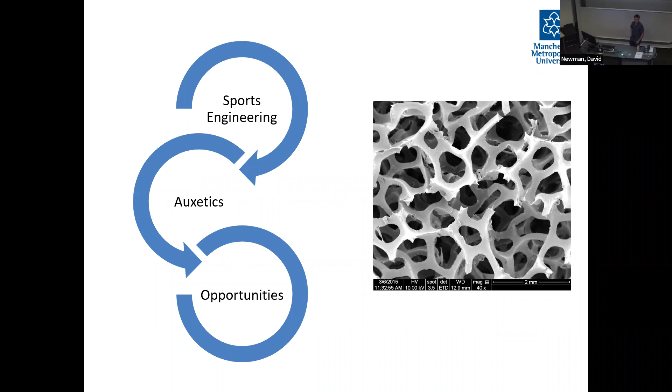So this is the structure of my talk. I'm going to start off by giving an overview of the work we do in sports engineering, an introduction to that field, then the work which we've been doing in Auxetic materials, and then finally bringing that together and talking about the opportunities to bring these areas together - that's Auxetics and metamaterials in general and the sports communities.

So first of all, what is sports engineering? Engineering is about solving problems, using a good understanding of physics and maths and the application of technology. So that's exactly what sports engineering is, except we're solving problems within sport. For example, how to help this person vault higher, or how to reduce their injury risk when doing so.

So I'm interested in the effect of technology on sport, and this distills down into three main areas. So we have performance, participation, and prevention, and that's prevention of injuries.

We can work with different organizations to look at different problems. And one of the nice things about the sports sector is it tends to be rapid uptake. So it's a good place to test and explore opportunities for things like metamaterials and to explore manufacturing. And then this can then feed into other industries afterwards. So it's an ideal test bed.

I work with different organizations and I'm on different committees. So I'm on the committee for the International Society for Snow Sports Safety. That's all about reducing injuries in snow sports.

I'm involved with the Biomedical Engineering Division, so the committee of the IMechE, and that is where sports engineering fits. But sports engineering can also feed into health and recreation as well.

I'm on the BSI committee, protective equipment for sports players. So that gives me a really good understanding of the role of protective equipment and how we can regulate and certify that. I'm the editor of Sports Engineering Journal, and I'm also the lead editor for the next Routledge Handbook, Sports Technology and Engineering. So that's going to be the second edition.

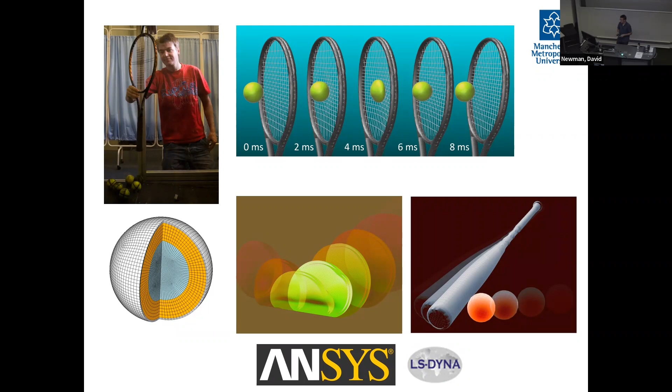My work typically involves experimental mechanics and modeling to understand the performance of sports equipment and associated materials. And we often use high-speed cameras, as you can see here.

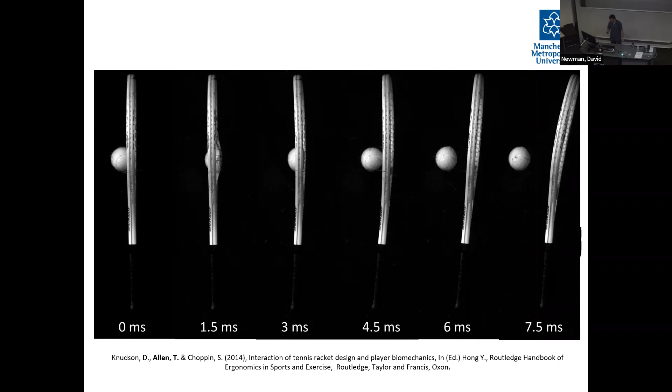This example is for a tennis racket, and we can really use these cameras to look at this in detail and understand how the ball and the racket interact and how the racket vibrates after impact. I have a couple of examples here. The one at the top, you can see the impact position is lower down and the racket is vibrating more, whereas the one in the second image underneath, we're impacting more towards the center or the node point, so we have fewer vibrations of the racket.

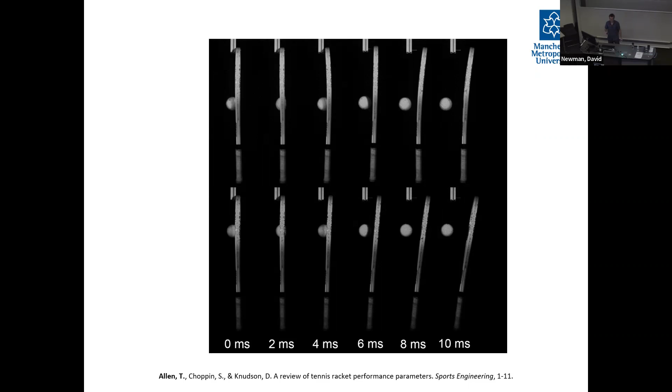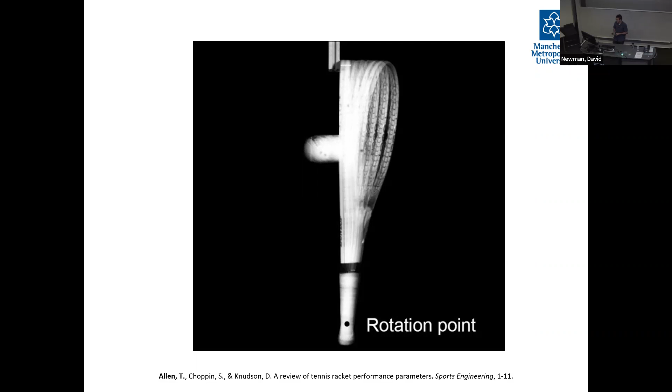And then we can look at other concepts such as a center of percussion, where the force is translated through the hand and you get less jarring effect. So that's just a few examples of how we use high-speed cameras.

but also the governing bodies as well. So the ones who set the rules, ensure the game is fair and the injury risks are low and athlete welfare is really considered.

And museums such as the Wimbledon Lawn Tennis Museum, where we can go and characterize things like old rackets, and then that feeds into education. And then research organizations as well, such as the UK Metamaterials Network.

So there's lots of opportunities in sports engineering. As I was saying before, it's a rapid uptake sector, so it's a good place to test and try new materials and bring them into products. I'll be talking about some examples of that as we go through.

Now talking about sports engineering specifically, these are some of the areas I'm going to talk about. The work we've done on wrist protectors, where we've developed the first ISO standard for snowboarding wrist protectors. Rugby padding, working with World Rugby to update their regulations for body padding. Running shoes, looking at the degradation of shoes and how that affects performance and injury risk. And then tennis rackets, where I'll give an example of the work I've done to implement auxetic materials into tennis rackets with my partners.

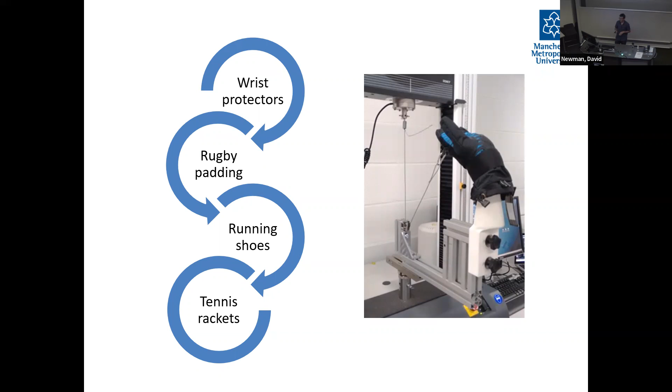So first of all, wrist protectors. We're working with the International Society for Snow Sports Safety and the BFU, the Swiss Council for Accident Prevention, to develop a standard for snowboarding wrist protectors.

Wrist injuries are really common amongst snowboarders. As you can imagine, you've got your feet strapped to the board. If you fall over, your natural instinct is to put your arms out, and then you can fracture your wrist, or you fall backwards. Around 30 to 40% of all injuries are to the wrist.

There are wrist protectors available, but most people don't wear them. And before we started working on this project, there was no standard. So we developed this test.

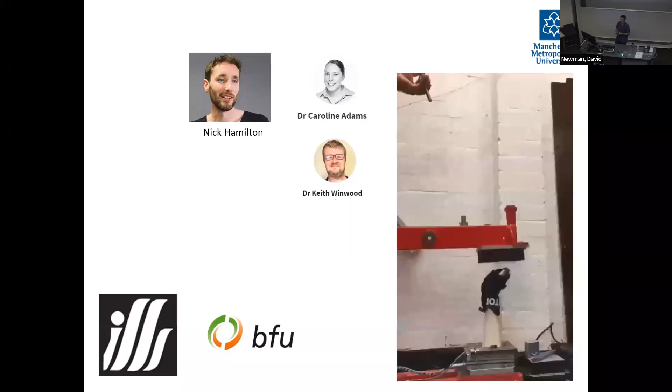I'm working with Nick, who's at Sheffield Hallam University, Caroline and Keith. Keith and Caroline working with me at Manchester, but Caroline's now at the English Institute of Sport. She developed this rig as part of her PhD.

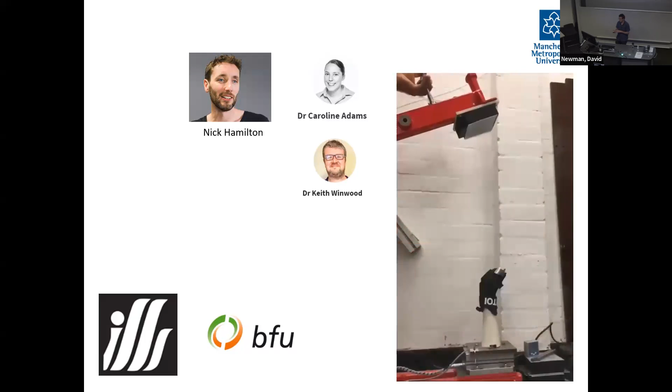We can see we can simulate this very harsh impact down onto the surrogate wrist, with the wrist protector fitted as well. We can measure the angle of the pendulum, the force transferred through the wrist, and the angle of the wrist as well.

We can use advanced techniques such as digital image correlation, so we have a pair of stereo calibrated cameras. We have a speckle pattern on the back there, and you can see that we can measure the displacement.

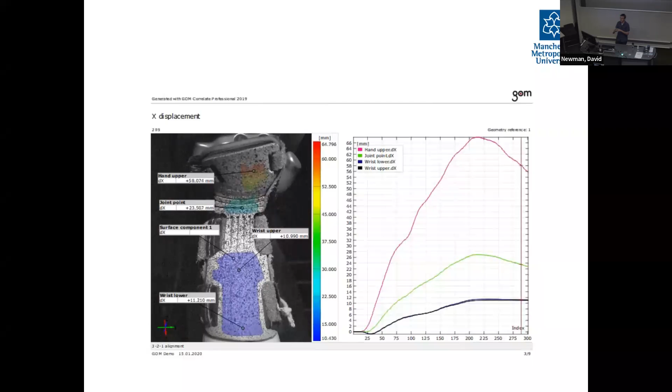And we've done lots of different iterations, particularly involving developing the surrogate we're testing with, so the wrist, to make it more realistic, or more biofidelic.

And this led to the development of this new standard. Now that we have the standard published, we're moving into working with the manufacturers to ensure their products are certified to that standard.

We're working with different organizations, such as the snowboard schools and the BFU, to raise awareness of wrist protectors amongst snowboarders, and then ultimately to document injuries. This will then all feed back to a future revision of that standard, so we're continuously monitoring what we're doing and looking to improve.

In similar work, we're working with World Rugby to develop standards and regulations, to review their existing standards for body padding. Rugby players often wear body padding, particularly on their shoulders, and that is to prevent cuts and abrasions to soft tissue. It's not to prevent severe injuries such as dislocations and breaks. That's a common misconception, but that's World Rugby's intention, and that was something we had to really consider when reviewing these regulations.

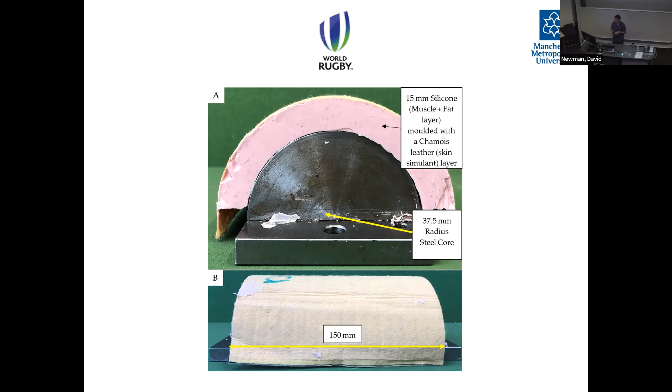Similar to the wrist protectors, we built a surrogate, like you can see here. This is a basic surrogate to represent the shoulder. We've got a steel hemisphere covered with a soft tissue simulant and then a skin simulant on top of that.

Like I was showing before, we can do testing, so experimental mechanics. Here we've got an impact test coming down, that's on one side, and on the other side, you can see we can angle that plate and look at different scenarios. We can put padding on top. We have load cells underneath, so we can measure the force, just like with the wrist protector, and we can film with a high-speed camera.

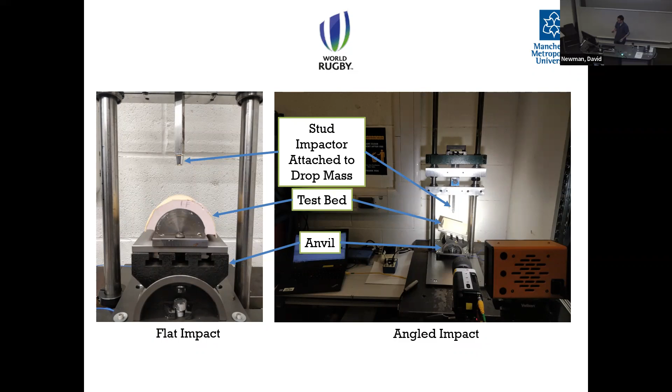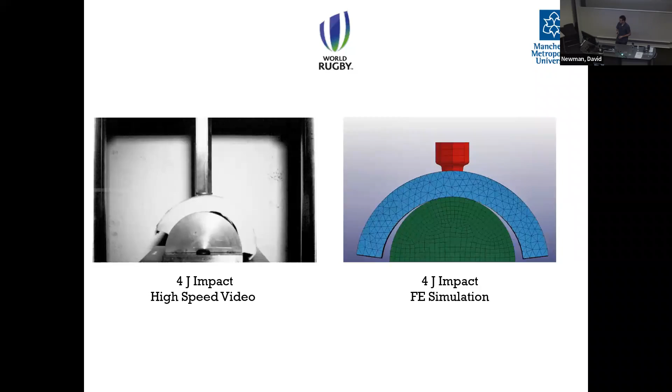Some different scenarios here that we're looking at with the model, just a couple of examples. One, we can look at the effect of placing some kind of protective material on top, with a raking scenario underneath. This led to the update of the body padding specifications.

So just like we're doing with the wrist protectors, it's now about working with the different organizations that make this padding to ensure their products become certified, documenting the number of certified products on the market, how often they're used, and then how this affects injuries.

And continuing that cycle of updating and improvement. Some things that we've done, what's important with these regulations is to ensure they're not restrictive, so they don't stifle innovations, such as the application of metamaterials into these products.

Another example here is some work I was doing with my students on running shoes. We're looking at the degradation of running shoes, which would be used in a marathon, for example. You might run for several hours and the shoe properties could change, particularly over a sustained period of time. So if you're running marathon distances while training over a long period, the shoes can degrade. We have a test here where we can mimic that.

This is filmed with a high-speed camera. We can compress the shoe many times, see how the properties change over time. Once we have the test set up, we can then explore different solutions, which could be improvements to material or using structures rather than foam. And that can have implications for both performance and injury risk.

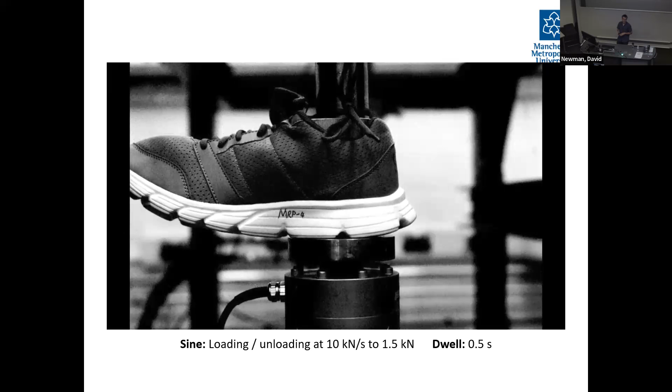And the final example from sport is with the tennis rackets that you see here. We're interested in characterizing how the tennis racket has changed since the origins of the game, and the influence this might have had.

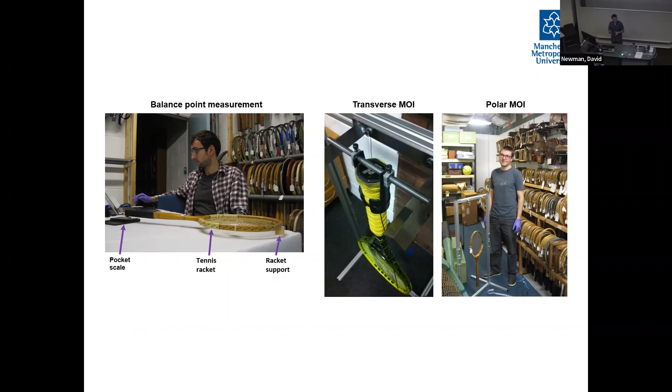This is myself and Luca. We're very lucky we got to go to the Wimbledon Lawn Tennis Museum. Luca's there measuring the balance point, and I'm measuring the moments of inertia. We're measuring lots of rackets, so as you can imagine, we had to have quite slick techniques to go through, but also ensure it was rigorous as well.

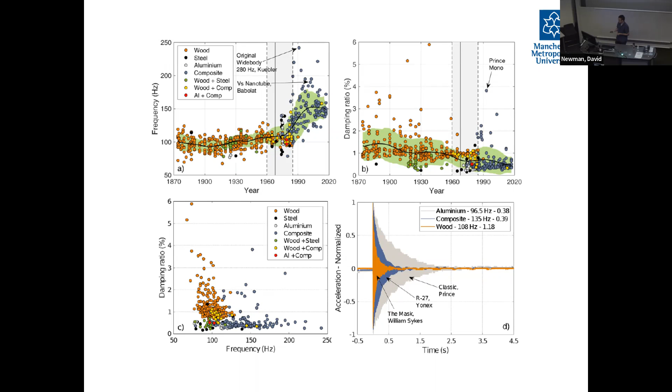We published this work in open access, in MDPI Applied Sciences. One of the key things here is we were talking about the potential to use auxetics and other advanced materials to overcome some of the problems that we saw. And that's exactly what I did.

Myself and Andy, who I work with very closely on the auxetic materials, we approached the tennis racket company Head and we talked to them about the idea of auxetic composites. We showed them that you can make auxetic composites using the conventional materials which they would use, by just laying up the composite layers in a different way. This was something they were interested in, particularly when we explained that that can have an improvement in the vibration damping.

That's one of the key benefits of auxetic materials, and they liked this idea. We worked with them, and that led to a range of tennis rackets which are now on the market. Now we're really looking forward to continuing to work with them to realize the full potential of these materials, and also to really understand some of the potential benefits.

So now I'm going to talk about the work we've been doing in auxetic materials. This is some of the people in the team that I work with. We have Todd, who's doing this as part of his PhD, Keith and Ollie, who I work with in Manchester, and then Andy, who's a professor of smart materials and structures at Sheffield Hallam University.

Andy and I started working together about 10 years ago, and we've been really doing a lot in this area to bring together his area of smart materials and my area of sports engineering. And that's what I'm going to be talking about now.

Many of these materials, it's related to the structure of the material that gives them the unique properties. So we have the auxetic foam on the end here. Because of the specific structure, which I'm going to talk about in a minute, when we pull that, it will expand. Then we have one of Ollie's structures, which he's currently working on, in the middle. This is a 3D printed structure, but this animation here is from a model.

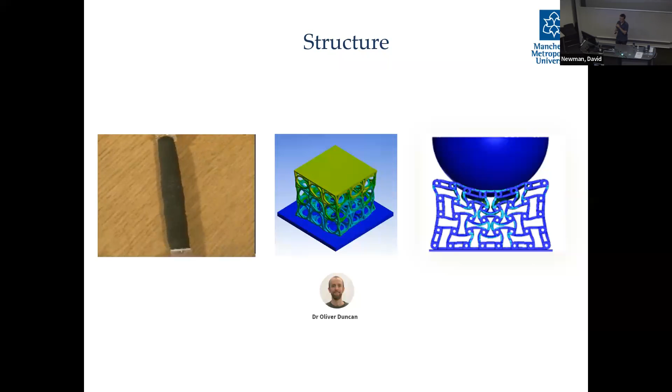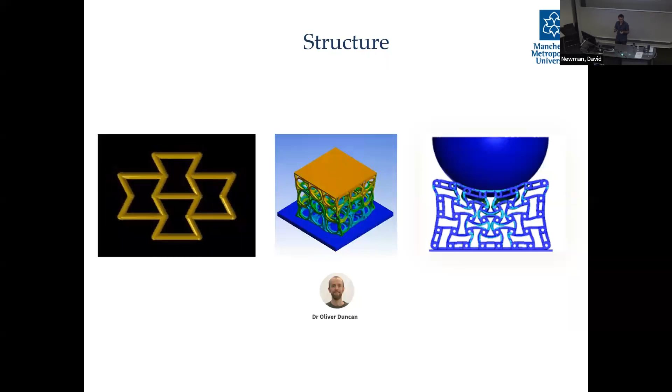On the far side, we have a 3D printed structure, so that's an auxetic structure. You can tell because it's coming inwards, and that's one of Todd's structures. The difference between this and the foam is because it's 3D printed, we can finely control the design of that structure to get the properties that we want. We can look at different structures, and we can vary different things and look at gradients. I'll be talking about that in a minute.

First of all, this is a definition of Poisson's ratio. A conventional material, when we pull it, will contract. With an auxetic material, it will fatten and expand. So it's counterintuitive.

There's different ways of achieving this. It's often related to the structure. This is one of the PhD students' work that Andy and I supervised, and here we're looking at rugby padding. We've got conventional foam, but we've cut this specific pattern into the structure that you can see here. So this pattern, when we pull it, causes it to expand and have those auxetic properties.

Quite interesting, when we were working on the rugby project, we actually saw some auxetic patterns in the rugby padding, which we were cutting out of the jerseys and looking at. So that's the way that they were shaped.

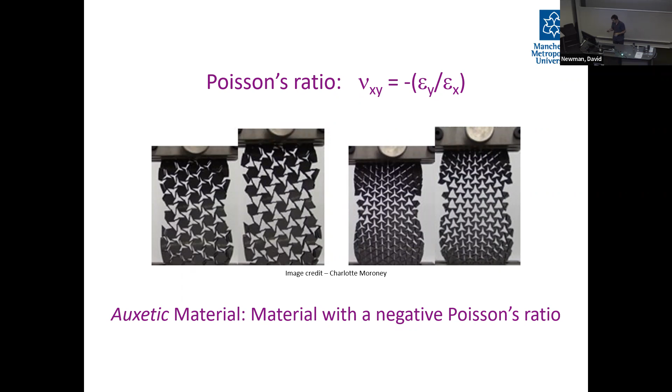And if we can get Poisson's ratios down as far as -1, then in theory, our hardness or indentation resistance will tend towards infinity. That's interesting from a theoretical perspective, but from my perspective as a sports engineer, it's, well, can we actually produce materials which do that?

And can they work in that fashion over the full strain and strain rates and scenarios which we're interested in? So that's the real challenge.

And then we have curvature as well. Our conventional material, when we bend it, will saddle at the top. Whereas our auxetic material will form a nice dome shape, which we call synclastic curvature. And there could be some benefits there, so it could fit inside a helmet or a knee pad or a shoulder pad in rugby. There are some examples already of this, which I'll be showing.

This is one of Ollie's videos showcasing the indentation resistance. These are open cell auxetic foams. We've got a range of Poisson's ratios going across here, and we're indenting them with a cylinder going back into the screen and coming down on top of a cube. We can see the auxetic material is coming inwards, as we would expect, and densifying underneath. The zero Poisson's ratio is coming straight down, and the positive Poisson's ratio, conventional material, is coming outwards.

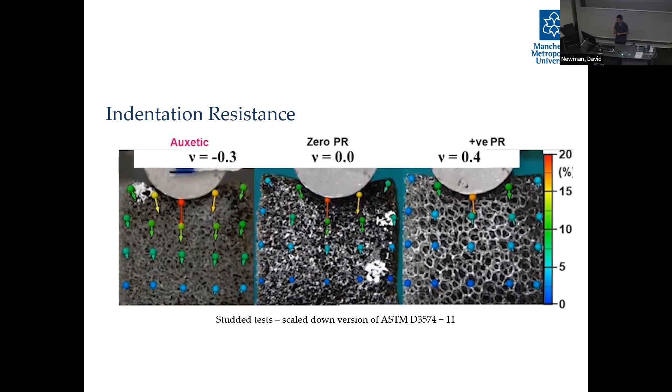We can have auxetic materials in nature. We've got some examples here. And as I was saying before, they're also starting to emerge in sports equipment. In the middle is a tennis racket from Head, which Andy and I worked on, based on auxetic composites. And then we have some other examples as well.

We have some running shoes. In green, we have the Under Armour running shoe. You can see that classic bow tie structure, the very classic auxetic structure there. What's interesting is that it varies across the top of that shoe, so you can have different properties in different places. I think the idea is it can be quite tight, then you put your shoe in and it will expand and fit to the areas where you want it to fit.

And then we have the Nike shoe underneath. You can see the sole, you can see the structure is cut through that, so that will bend and move in a certain way when you bend it. And then we have the Puma shoe, where we have the structure going through. One of the things you'll notice is that many of these examples are based on the structure of the material, rather than the material being auxetic itself.

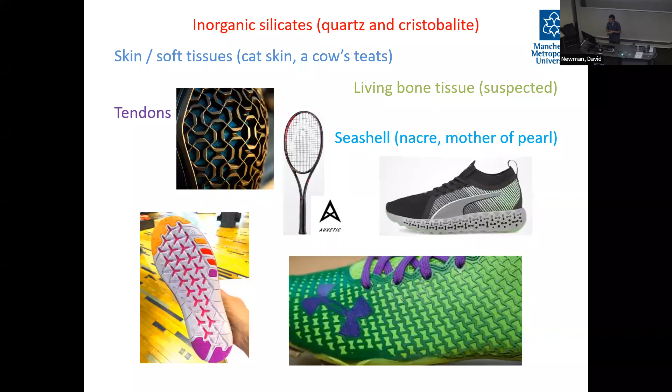And then we have an example at the top there for a knee pad. Exactly what I said before, it forms that nice dome shape, and that's the benefit we're having here. You can see from that as well, it's relatively similar in shape and concept to the Under Armour shoe underneath in green.

So I'm going to talk about the work we've been doing on auxetic foams, and some of the key publications to do with the sports area that we published.

First of all, we need to make the foam. We've actually been able to do this for a long time, right back to the late 80s. But from the sports engineering perspective, it's more about how do we make it more consistent, mass produce it, and test it in large samples. We take our conventional foam with a conventional cell structure, then we need to compress it to get this reentrant cell structure, because when we pull that reentrant cell structure, it will expand and give it that negative Poisson's ratio. So we can squash it into a box, using some kind of pressure. There are different ways in which we compress it.

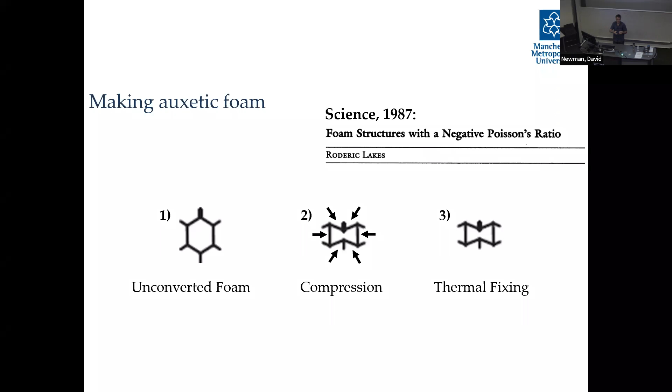And then we need to fix it as well. So we could place it in an oven so it softens, and then take it out so it hardens, or we could put it in some kind of chemical bath that causes it to soften, and then take it out. We're basically changing the structure and then setting it in that new structure. Typically, we would use thermomechanical methods. And I'll just give an example here.

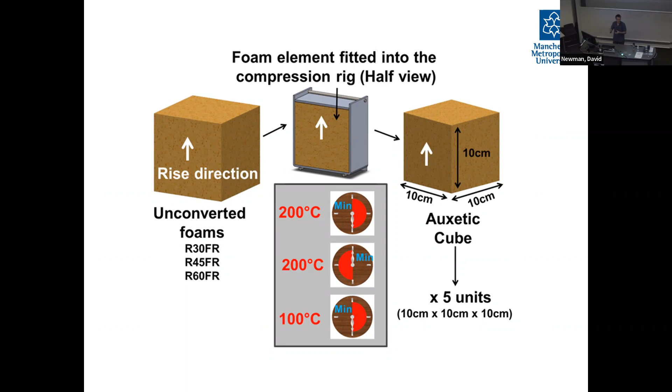So we take a cube of foam, for example, squash that into a metal box, place it into an oven, and then take it out of the oven, let it cool in the box, and then we have our Auxetic foam. Relatively straightforward process. You can see here we've got the metal molds, and this is purposely quite straightforward because we wanted to do this in our labs and be able to demonstrate it.

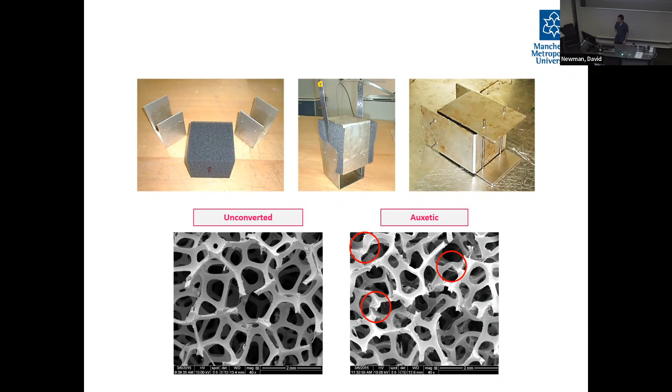We can do different testing. So we can have quasi-static testing, where we might compress it between two plates, or pull it, film with a camera, check that Poisson's ratio, also dynamic testing as well. I think that's one of the areas that our group's quite good at - dynamic testing, because that's where it really applies to sports equipment. It has to actually work in the area where it's needed.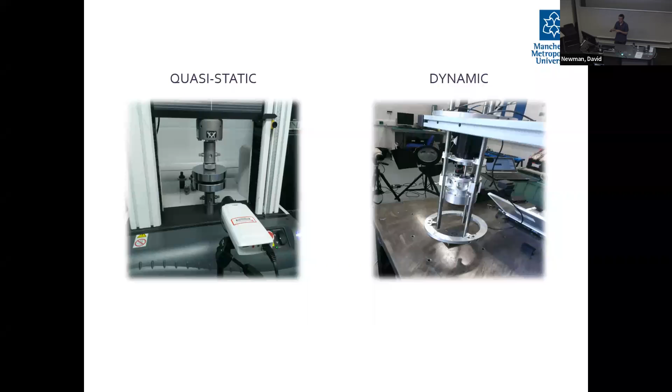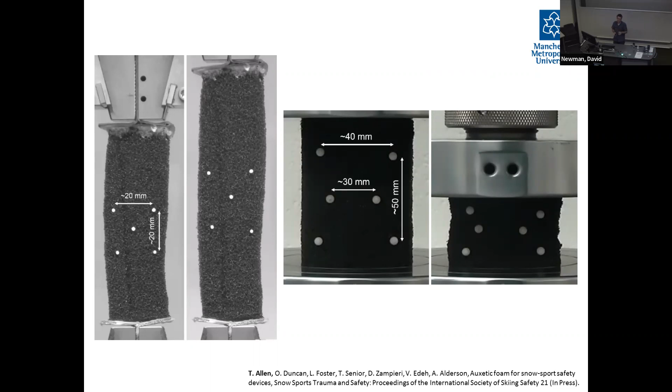So some examples from some of our earlier work, where we have a tensile test, and we have some pins in there. So as we pull it, we can track to see if those pins are expanding and measure the Poisson's ratio. And then we have a compression test, where compressing and contract, see it's contracting. We've moved away from that now, and we tend to do more full field strain measurement with digital image correlation. And I'll show you some examples of that as we go through.

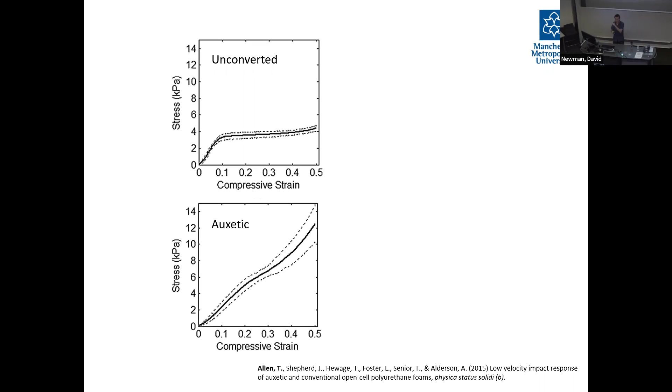We can look at our stress strain relationships - the force that we're applying and the amount that it's compressing. And we can see for our conventional material, we have that expected plateau region. Whereas our Auxetic material, because we've already compressed it, we see a much more linear stress strain relationship. And this is related to the cellular structure, as I was saying before.

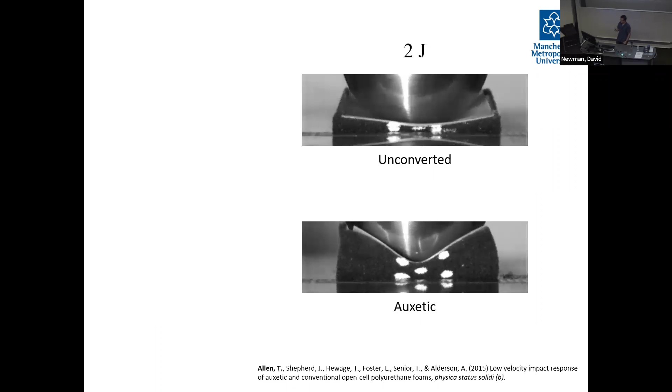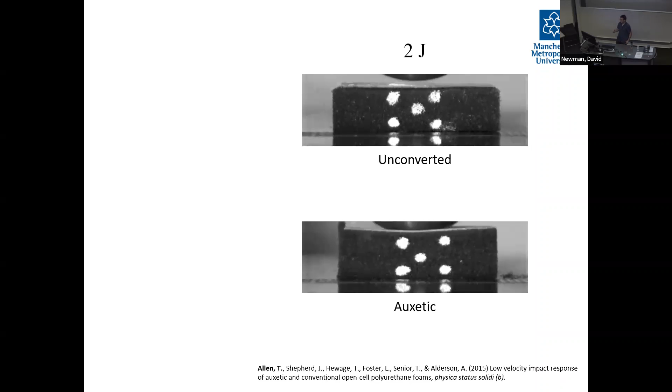What we're really interested in is dynamic tests. You can see here, so we're dropping a mass down onto our foam. At the top, we have our sample of foam - these are open cell foams, unconverted, with a thin shell on top to mimic some kind of body armor, and then a hemisphere made of steel coming down on top. And then underneath, we have our Auxetic sample. We have the marks on here, you can see as well, so that allows us to track it.

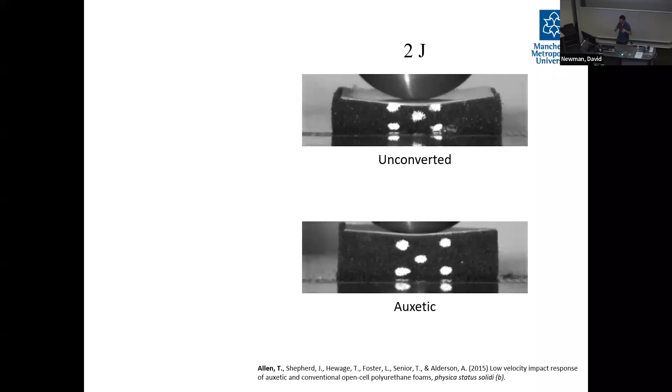Again, this is relatively old, and now we're using more full field strain measurement. You can see for our unconverted, it offers very little resistance to that dropper, and you can see the dropper is pretty much striking against the table. The Auxetic is coming in exactly as we'd expect, preventing it from striking against the table.

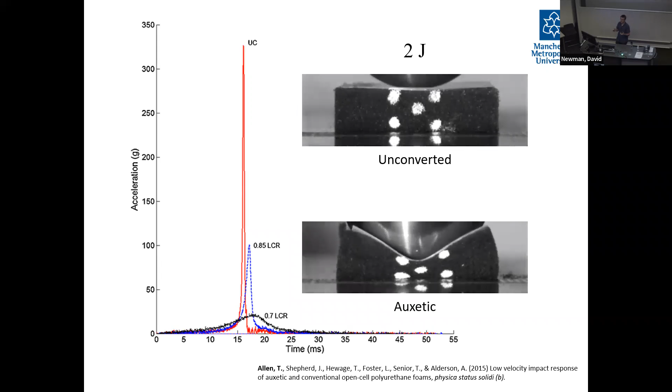So when we look at our acceleration time trace, because we have an accelerometer embedded within the drop mass, we can see for our unconverted, we have that very short, sharp increase in acceleration - that would be bad, that would be related to some kind of injury risk. And then when we look at our Auxetic material, we have a much flatter, that's in black, longer, pronounced acceleration time curve. And then our other material in blue, which is the intermediate, so might be closer to a zero Poisson's ratio, is somewhere in between. So exactly as we'd expect.

And what we do is we combine the raw data with the high-speed camera to give us a really good understanding of what's going on. Once we understand, we can then start applying it.

So now I'm going to talk about closed cell foam, because what I've been talking about before was open cell foam. It's very easy to work with, very easy for us to do our experiments with. But the problem with that is it doesn't really apply to sports equipment. Maybe in some kind of comfort layer in the helmet or padding in the upper of the shoe, but not so much in performance applications, like within the running shoe, and in the midsole.

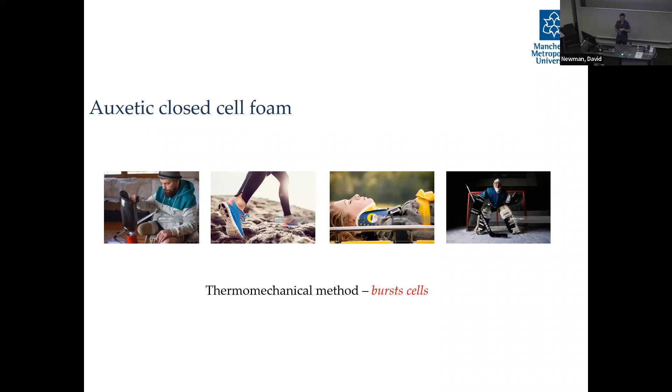So we're interested in closed cell foam, which is much stiffer. It's stiffer because the air is trapped within the cells, so when we go to compress it, it can't just come out of the cell like it does with open cell foam. But that also makes it harder to work with, because if we were to use the same process and just compress it and heat it, we would essentially just burst the cells. So we need to look at other ways of doing this.

So there was this paper in 2018, and Ollie's made a nice animation to explain this. Essentially what we do is we steam the foam, so this is just water. We put it in the oven and we steam it in a steam bath.

The water goes into the cell and that causes it to contract, as you'll see here. And as it dries, you're then left with that reentrant cell structure, which gives it that negative Poisson's ratio.

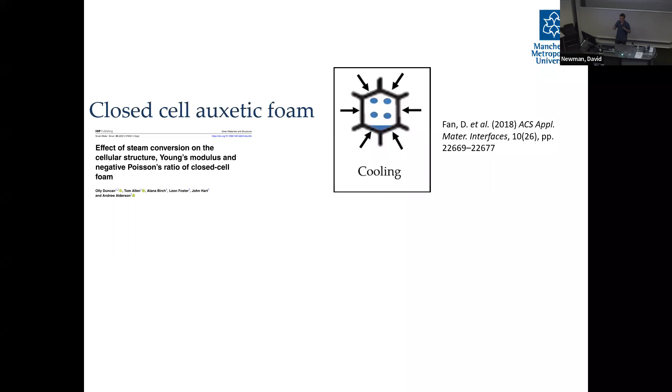So we got inspired by that original publication, and we then took this and did our own publication. And what we're doing, because we're more on the applied side, is taking that and saying okay, that's a nice idea, but how does that affect the parameters? If we change the different parameters, what's the best way to make it consistently, make it in larger samples? So we published on that.

And then we had a follow-up publication as well, where we're looking to see if we can manipulate the properties of the foam during that process. So if we were to place pins within the foam, could we stretch it in one direction whilst contracting it in another, getting very distorted or elongated cells, which would give extreme properties?

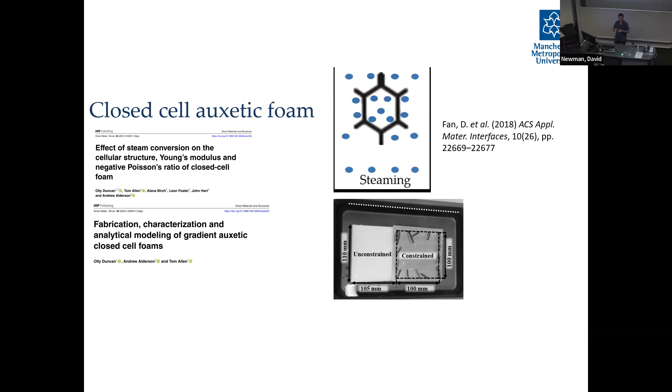Or maybe one bit would be steamed and one bit wouldn't be steamed, and then we can have negative and positive Poisson's ratio in the same part of the material. And then that allows us to look at gradient structures.

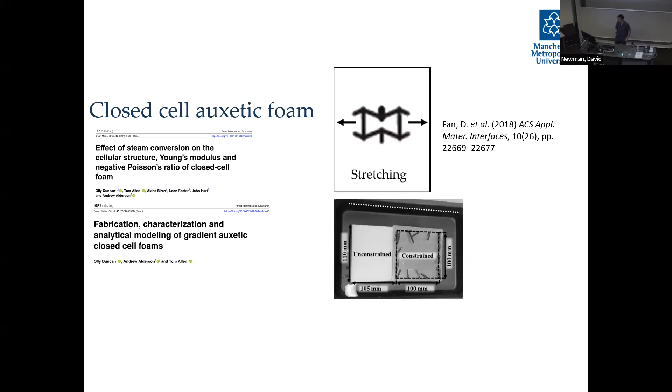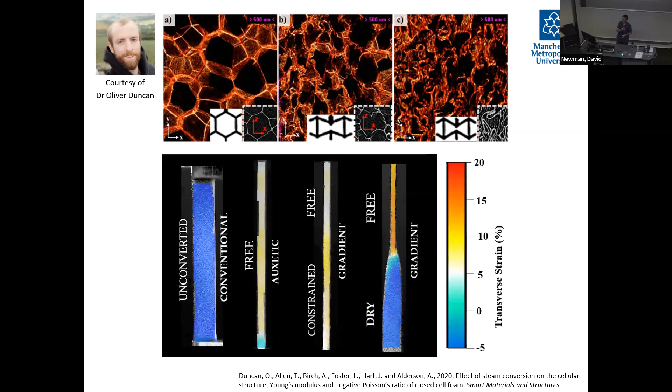And then we have our gradient structure, so half of it might be auxetic and half of it might be conventional. And that's because half of it has been exposed to the steam bath and the other half hasn't. It's relatively straightforward.

Again, we're more interested in moving towards production, having this in actual products, and that's quite hard to achieve using a process like that. So what we're looking at is a pressure vessel, and this goes back to '96, a relatively old method. We've been meaning to do this for a while, and one of our technicians at the university really helped us with this, because he came up with this very simple design for a pressure vessel.

And we're using off-the-shelf components, so it's low cost, simple to put together, and crucially, we don't have to go out and get it certified, which adds extra cost and uncertainty, because obviously taking a pressure vessel and putting that in an oven is quite a dangerous thing to do.

So this comes pre-certified, bolts together, and we put a little valve in it, and we can pump it up with a bike shock pump. So it's very simple, straightforward process. And then we have a thermocouple inside to measure the temperature.

And then what we found was there was an extended period at the end where the foam would be settling and maybe slowly expanding or changing or contracting at the end of that process. And that was quite slow. That actually lasted for several weeks, where Ollie would be continuing to measure the properties.

One of the things that we found was if we put it in a vacuum chamber overnight, that accelerated the process, and then the next day the foam had settled. And it's probably possible that it would actually settle much quicker. We just did it overnight and then we checked it in the morning and it was fine. So that all went into that publication.

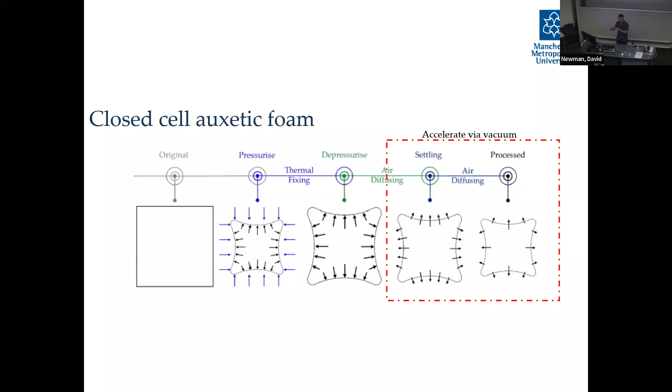Some of the other work we've done is actually measuring the Poisson's ratio under impact and in dynamic scenarios, to check that it actually transfers, because that's important, and also transfers to the strain magnitudes that we're interested in.

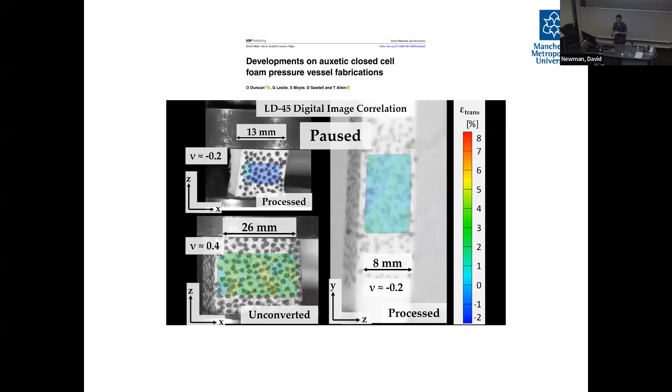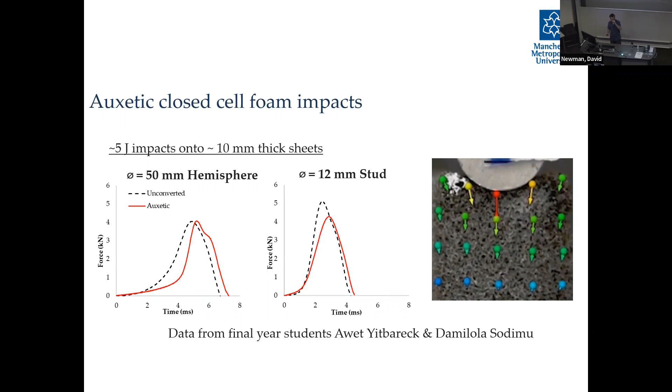So this is important because it means we might be able to remove the need for a rigid shell on top of the protective equipment, so more people would then use it. And we might be able to have a gradient structure as well, so we could have very high indentation resistance at the top, maybe lower underneath.

So now I'm going to talk about some of the work we've done, rather than working with foams, but 3D printed or additively manufactured structures. This was the work that Todd was doing. This is one of the papers that he published.

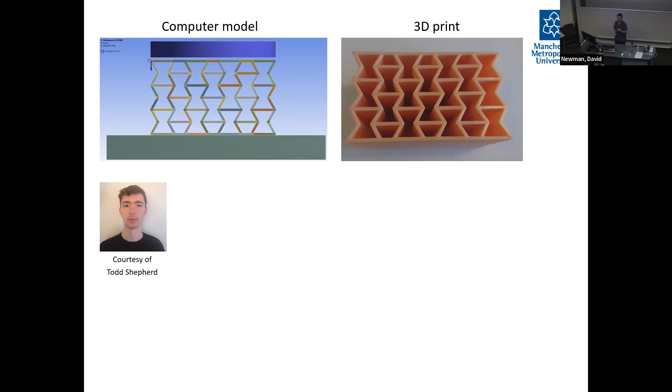So here we can see we've got a computer model. This allows us to design the structure, and then we have a 3D print, printed directly from the geometry of that model. The advantage of this is that we can finely control the structure, so we can get the exact properties that we want, and we can manipulate and change them.

One of the things you'll notice is that these structures are relatively similar to those which we've seen in the sports equipment, particularly the Under Armour shoe at the top and the knee pad underneath.

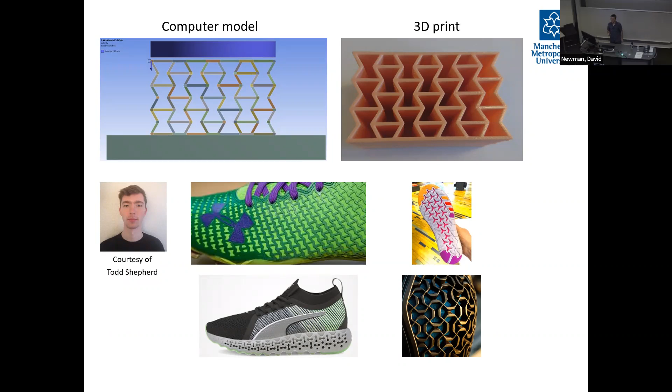So we print these in the university on the 3D printer, just a low-cost desktop printer using the TPU NinjaFlex, which is a very flexible material. We just print it out like this, takes a couple hours, and then we have a prototype which we can test. So we have our model, we have the prototypes, and we can go through that cycle of testing and modeling.

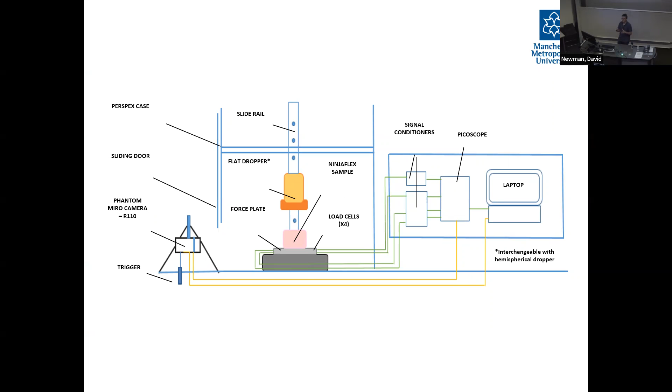We can test it under impact. So we have a drop rig here, with a mass coming down on a rail. We have load cells positioned underneath the sample, and then we're filming with a high-speed camera, all synchronized together, so for every bit of force, we can have a corresponding image as well.

And it helps us to understand, because we're creating a model, we need the material properties. So you can see here, we've got a 3D printed disc. We can compress this between the plates, and we can do that at different strain rates.

So we have strain against stress in this plot, the amount we're compressing it and the force to compress it. We compressed it slowly in the machine, and then we've also compressed it under impact. We see that we have much higher stiffness when we do it under impact, so it's rate dependent. What we actually used was the properties from when we were doing the impact test.

Then we have our stress relaxation test on the other side. In this test, we're compressing it quickly, then we hold it and look at how the stress changes over time, or the force to hold it. You can see there that it's decaying, which again shows that it's rate dependent. And we put these into our model.

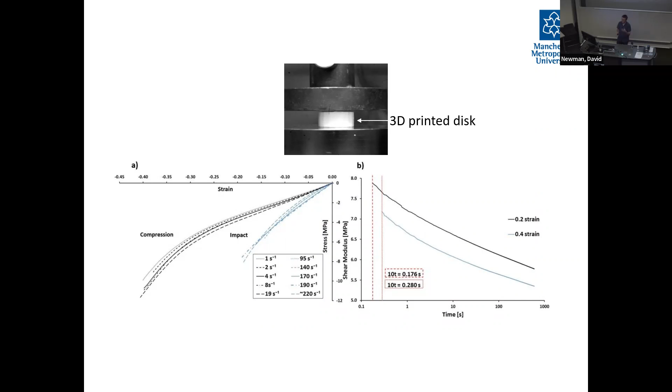And these are some examples here. So underneath, we have our structure, and we're impacting it in our test and filming with the camera. And then across the top, we have our models.

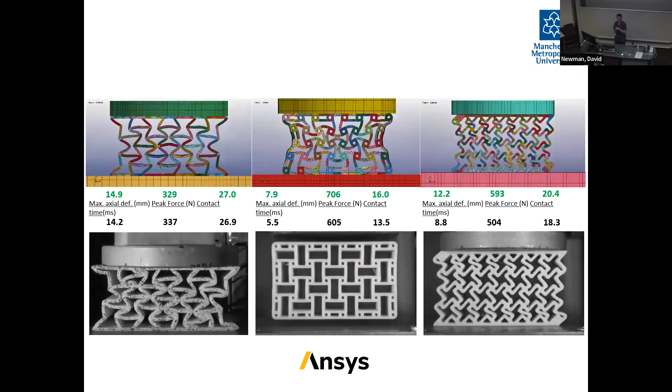The idea is that we check the model against the experiment. If the model and experiment agree with each other, we can then use the model as a design tool. This example is for a flat face dropper, but we've also done work with other shapes, including a hemisphere, and again this is where the indentation resistance advantage in the auxetic material can really come in. As you can imagine from those shapes, there are different advantages and disadvantages of using different types of auxetic structures.

These are just some of the examples we looked at. You could have a gradient structure, or different material properties in different places.

So these are the types of results we'd get. We have force against time, similar to before, with load cells underneath the sample. We've got different colors corresponding to different drop heights or impact energies, and you can see we have the flat and the hemisphere.

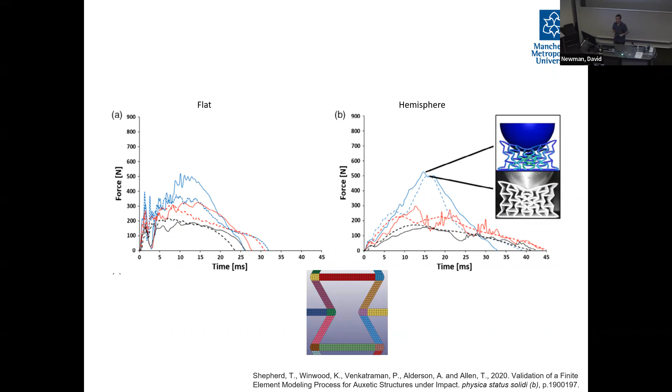We have reasonable agreement between the model and the experiment. The agreement was sufficient for us to then use that as a design tool. Underneath, you can see a snippet from the model and the mesh which Todd applied. I've included that to showcase the level of detail he went to in getting that mesh right, because that's really important to ensure the results are correct.

Here's another example of a structure with more elements within it, so it's more like a continuum material. This is some of the things we can see, and we can see it contracting in, confirming it's auxetic.

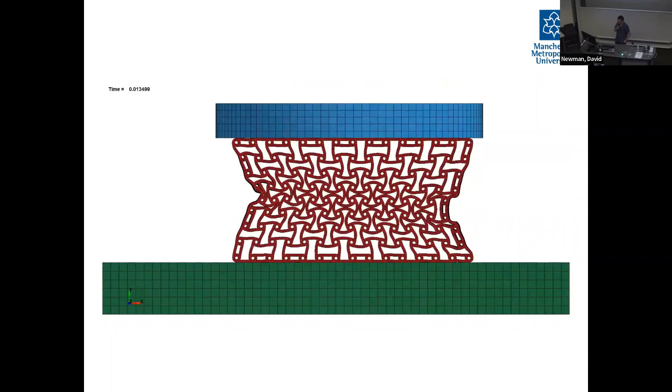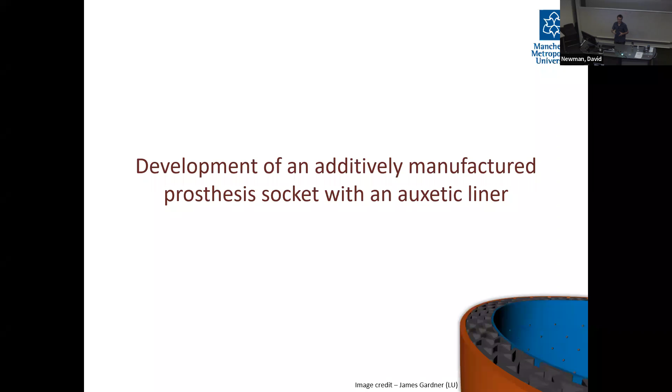This feeds into the final part on auxetics. We were working with Loughborough University to develop a 3D printed socket with an auxetic liner, going back to what I was saying before about encouraging the whole population to be more physically active, including children who use prosthesis.

Here's an example of the design we came up with. This was funded by the StarWorks Network, which is NIHR, about bringing together academia, industry, and the NHS to help solve some of the problems these children face in their everyday lives.

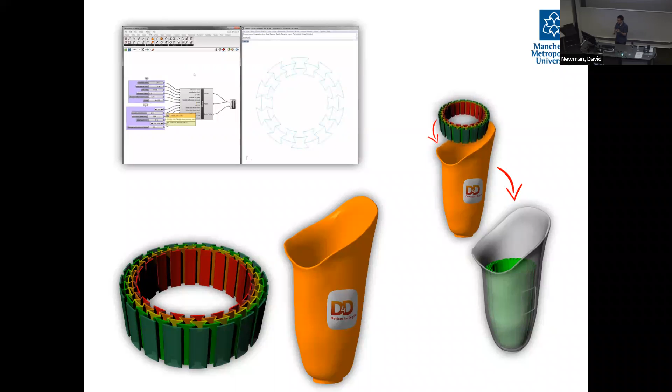This was a concept we came up with. Loughborough were working on the socket itself, the 3D printed socket using 3D printed composites, and we were working on the liner. This is some of the early concept designs, and this is what we came up with.

It was Simon, who I was working with at Loughborough, and we're still working together now on a redistributed manufacturing and healthcare network project. The idea is we've got the 3D printed outer and the 3D printed socket liner with an auxetic material, which can contract and move to conform to the individual. That could be due to changes in size throughout the day, short term or long term as they grow.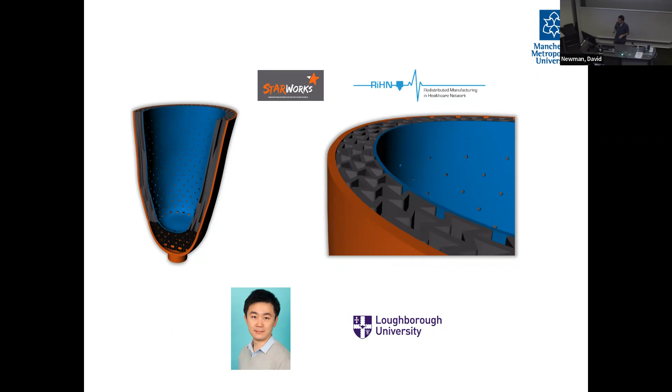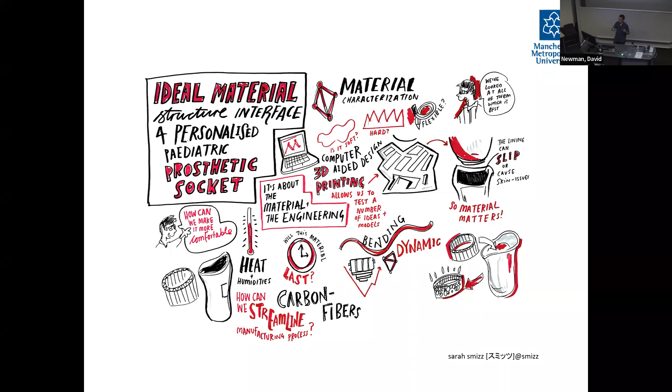At one of the StarWorks meetings, there was an illustrator sketching the different projects, and this is what they came up with for our project, which I think really sums it up well - it's all about smart materials and 3D printing, bringing those things together. We're now working together to bring this up to technology readiness levels. I think we're around 2 or 3 at the moment, and we're hoping to get more towards production and then bringing this onto the market to have some benefits.

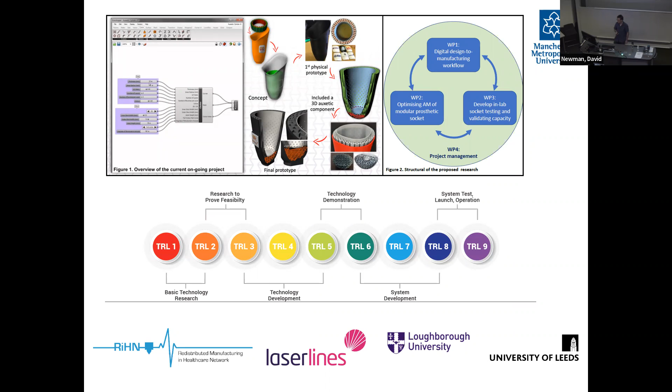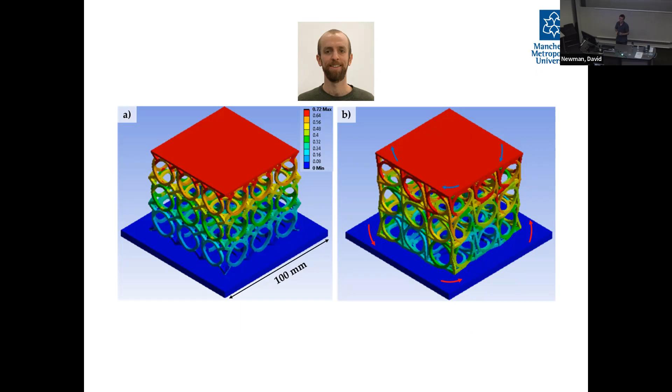Just to conclude this bit now, this is some of the work Ollie's doing, looking at these twisting structures. As I was saying before, you could argue these are auxetic because they contract in, but it's more about this novel idea of twisting, which Ollie's implementing here, and he's shown they're getting increased indentation resistance.

So I'm going to conclude by talking about some of the opportunities to bring these different areas together - the area of sport and the area of metamaterials - bringing them together to see what advantages and opportunities there are.

We've already talked about the tennis racket, you can see the image underneath. We had wood, we transitioned to composites, and maybe this is the next iteration of composites, looking at auxetics. We're already working with Head, and there's lots of opportunities to continue.

We can think about other products made from composite materials - skis, snowboards, bike frames, protective equipment. We have carbon fiber plates now in running shoes, so we can have auxetic composites in there as well. Helmets, shin pads - lots of different examples where these could be applied.

The work we're doing around fit and the prosthesis - there's problems in sport with ski boots, which tend to be stiff and rigid. You can get issues with circulation. If we want more people going skiing, particularly as they get older, this is the problem we need to be solving. Maybe there could be some kind of metamaterial solution which could help here.

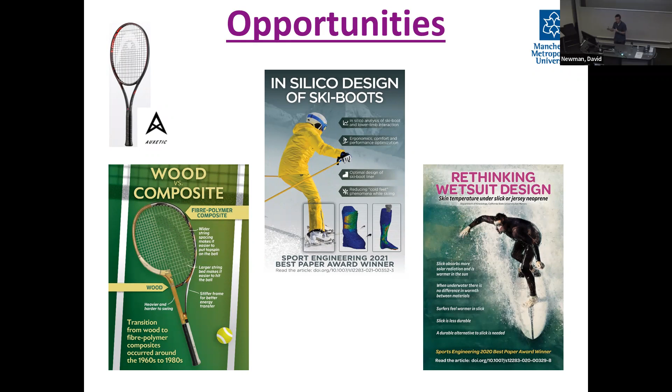So that's just a few examples, a few more related to what I've been talking about. There's the running shoes, so the degradation of those shoes over time, which can have implications for performance and injury risk. Can we come up with new materials, new foams or new structures which would degrade less?

And then protective equipment - there's the examples from Todd's work and Charlotte's work, which we've already shown, and there's some products on the market. There's a helmet here with an auxetic liner, and the shin pad and knee pad which I showed you before. But these tend to be just based on the structure, which is kind of extruded in one dimension. Maybe there's other ways we can look at this.

Maybe we can come up with some more advanced materials which adapt or conform to the specific requirements. And then the wrist protectors as well - wrist injuries are a common problem, as I was saying before, but not many people wear the wrist protectors.

If you look at this one here, with these very big stiff plates on either side of the wrist, it's quite restrictive. It's not necessarily what you want when you're going snowboarding, but maybe there can be some kind of solution which is very flexible and comfortable in normal use, but stiffens and expands and provides that protection when you're falling over. Because it's not just necessarily about the performance, it's about encouraging people to actually use these things.

So we talked before about the auxetic liner. Sometimes we've got the hard and the flexible, and maybe there can be some kind of smart, conformable or adaptive metamaterial, which has positive or negative properties depending on when you need those properties. That could be a Poisson's ratio, but it could be stiffness or other negative properties.

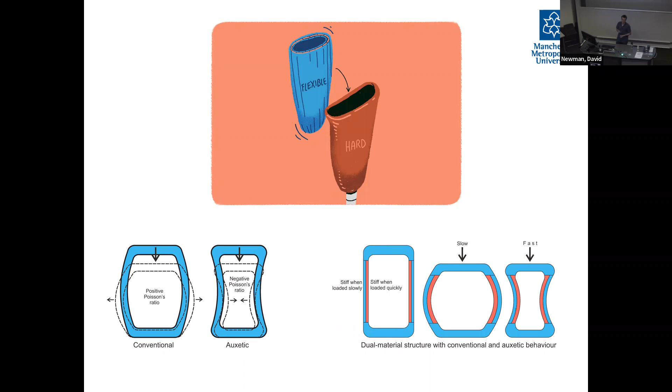So I'm involved with the International Sports Engineering Association. I'm the editor of their journal, Sports Engineering, and the UK Metamaterials Network. I think there's opportunities to bring these areas together. One of the things we're doing is looking to have a metamaterials in sport collection within the Sports Engineering Journal, which I think is a really good opportunity to bring these areas together.

And we also have our UK Sports Engineering Seminar Day. We hosted the last one in Manchester - it's a free event. The next one is going to be on the 12th of April at Canterbury Christ Church University. People interested in metamaterials can come along, as we've had speakers on that topic before. It's a great opportunity to stimulate work between these different communities.

Sport and advanced materials is also a great opportunity to empower the public and young people about science and engineering. So that's something we do - we have a Royal Academy of Engineering funded project called Sports Shoes, a Feat of Engineering. We're going into primary schools and talking about sports shoe design, the application of metamaterials, 3D printing, and all the things I've talked about today.

And just to conclude, there's a video here which Ollie's put together for the Institute of Physics.